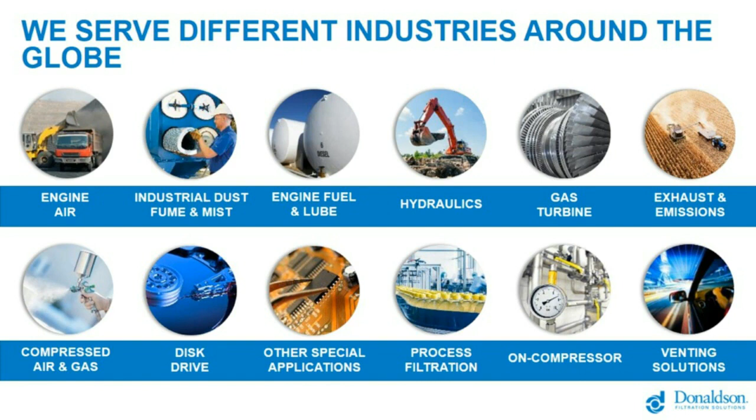Donaldson serves a lot of different industries around the globe, of which some of them are shown here on the slide. We combine different technologies, different shared lessons from different industries together, so we can optimize our products for a certain industry.

So today I would also like to have a small question to start, and I will give the word back to our host, Jonathan. Thank you very much. So now it's time for our first polling question. So for the audience, you can click on any of the options listed below, and we'll have a look at the answers shortly. This question reads, on a scale of 1 to 5, 5 being the most familiar, how familiar are you with the venting powertrain components?

Stan, is there a particular reason why you asked this question today? We would like to know the knowledge of the audience about this topic, and see how familiar they are with how to protect powertrain applications. Perfect. Thank you very much. So we'll just quickly have a look over the answers now. And there we have it.

So we have 35.3% on 2, followed by 29.4% on 3, followed by 17.6% on 1, and followed by 11.8 and 5.9, 4 and 5 respectively. Stan, are these the results you're expecting? Yes, we expected the audience to have a little bit less familiar or basic knowledge level of this topic. So you have come to the right place, because today we will start with a basic level discussion about this topic, but we'll also move further on to a more complex level.

So today we will discuss how to protect your powertrains with venting solutions. So a small overview of what we will discuss today is, what is venting? Why is it needed? Secondly, what are the unique challenges for powertrain applications? Thirdly, what are the advancements of Donaldson in this powertrain venting? And at last, how to validate such a venting solution.

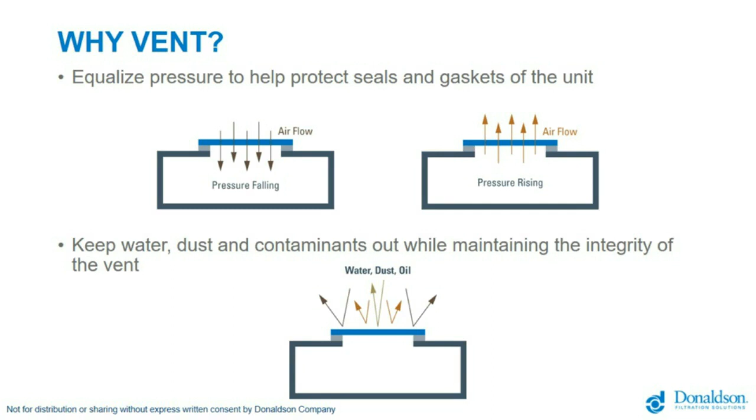Donaldson proprietary ePTFE Tetratex membrane, also called Teflon, is the core technology behind our venting solution. It has a unique micropore structure with small randomly connected fibrils at nodes that can be used as permeable water barriers, so basically being watertight, while the pores still let the airflow go through. Donaldson proprietary oleophobic process also makes the filter repel oil contaminants. So at the same time, the membrane will be hydrophobic as well as oleophobic.

This ePTFE Tetratex is used in multiple markets, of which some are shown on this slide, like microfiltration, syringes, industrial filtration, membrane distillation, but also in the automotive sector, which we will today focus a little bit more on.

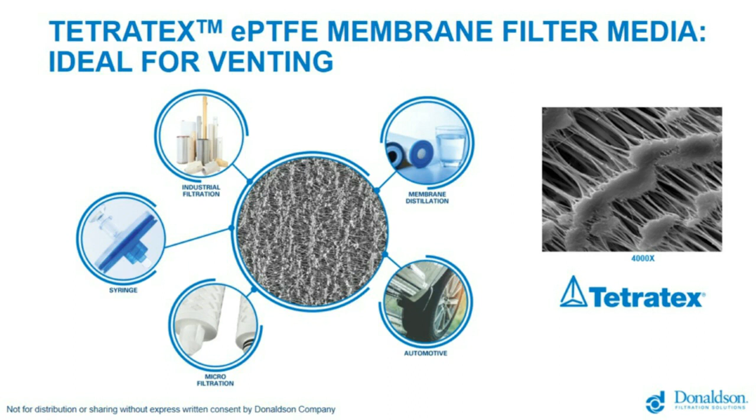If you look at the vehicle, there are multiple applications where a venting solution is needed. Some of them are listed below, like automotive sensors, lighting, horns, electronics, motors and pumps, hybrids, EVs, powertrains, fluid reservoirs. All those different applications have different requirements, so Donaldson has different configurations of our ePTFE Tetratex membrane for the different applications, and some of those standard components are shown on the right on this slide.

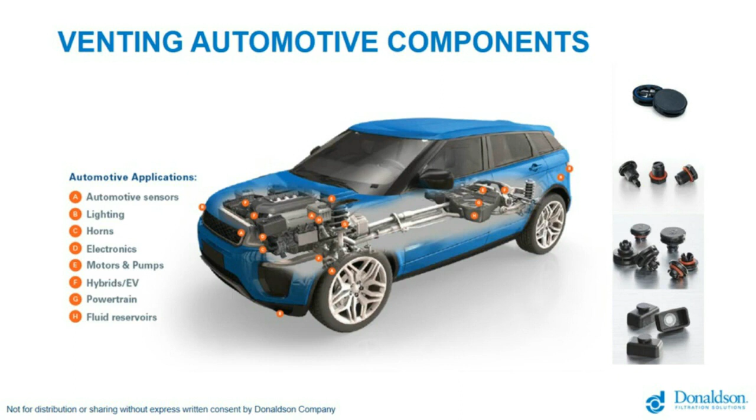If we look at potential vent locations for powertrains more in detail, we see that for the conventional powertrains, there are multiple vent locations possible. Some of them are like transmissions, power transfer units, axles, differentials. But we also see more and more similar needs for EV powertrains, because they have similar requirements, like e-transmissions, traction motors, e-axles.

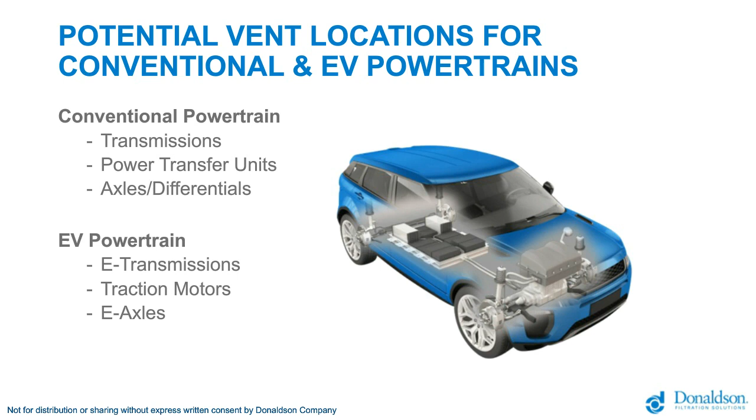But what is now the unique challenge with powertrain applications? In these powertrain applications, there is a lubricant present. If the components start to rotate in this lubricant, it will create a sling region for the oil, but it will also create an oil aerosol which will become entrained in the air volume. But after long-term continuous exposure, this oil aerosol will create an oil film layer next to the vent, which will prevent the vent from letting airflow through, and so it will stop the pressure equalization. This even happens when the membrane is oleophobic coated.

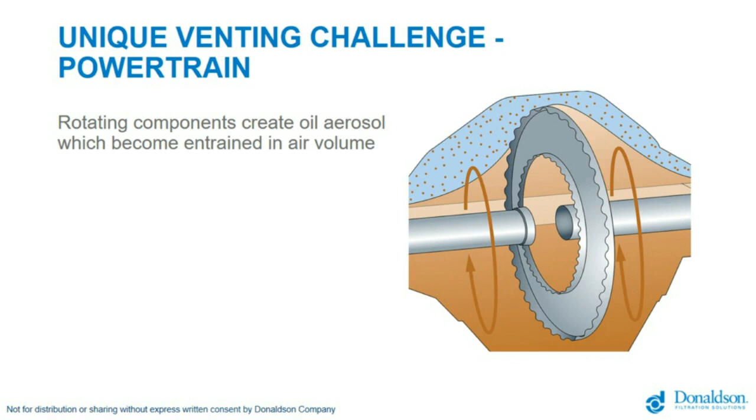Today, there are already some common venting methods for powertrains, like a jiggle cap or a hose breather. So basically, you connect the hose to one side of the housing, and the other one is to the open environment. Most times, the top opening of the hose is positioned above the water fording level, so it acts like a snorkel and no water will be going in. But at the same time, a big disadvantage is that contaminants still can go inside, and that the oil aerosol can go outside, contaminating other components of the vehicle.

A second solution could be a membrane-only vent like our Donaldson ePTFE Tetratex membrane. But as mentioned before, after long-term continuous exposure, an oil film will be present, which will stop the pressure equalization of the vent. A third solution could be to use a sorbent media vent. But after time, it will reach its saturation point and will start to plug. At that time, it will also stop the pressure equalization function of the media vent.

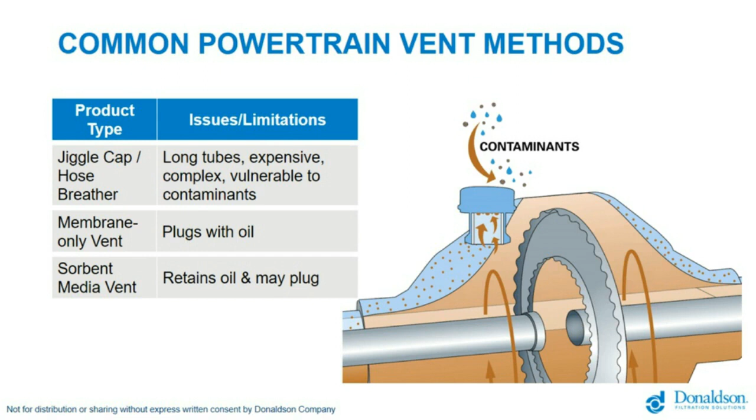Stan, thank you very much for the introduction. My name is Dustin, and I'm going to be covering some of the advancements in powertrain venting technology, as well as some of the validation efforts in the development of the powertrain vent.

As Stan mentioned, the ePTFE is a popular vent medium already used in the automotive sector for various applications. But when exposed to oil aerosol, it can film over, which causes a loss in airflow. And this is one of the more unique issues with powertrain venting.

Donaldson, having 100+ years in filtration expertise, set out to address the filming issue with its proprietary Synteq XP media. So what is the Synteq XP? This technology was developed specifically to reduce crankcase emissions in PCV applications. So the venting group then took this technology and adapted it into the powertrain vent in order to coalesce the oil aerosol present within the airstream in drivetrain components.

So what we did was a customer axle was used and customer fluid was used, and the component was run under various operating conditions in order to produce this oil aerosol, which was then characterized and profiled to understand the venting or the filtration approach needed to filter that out. So Donaldson then selected a particular Synteq XP grade to target the oil aerosols within the powertrain applications.

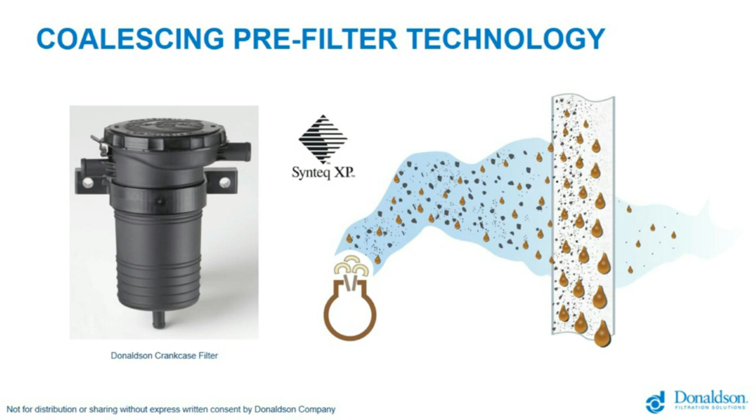So this Synteq XP technology, combined with the water tightness of the Tetratex PTFE, allows for effective venting of the enclosure while helping to maintain the life of the PTFE membrane, which is the real workhorse of the venting solution.

So here we can see the screw fit configuration of the powertrain vent. This is kind of an exploded view to show some of the internals working within. On top we have the vent cap, which in combination with the venting windows on the sides of the head help give water spray protection to the PTFE membrane. Beneath the membrane is the rib support structure, or the media retention disc.

This serves two purposes. One, it provides support to the backside of the membrane during a water fording event or when water pressure is applied from the outside of the vent. This helps reduce the deflection of the membrane and resist that, providing support. It also provides a physical barrier between the Synteq XP media and the membrane media up above. And all of this is in a fairly compact screw fit package all together.

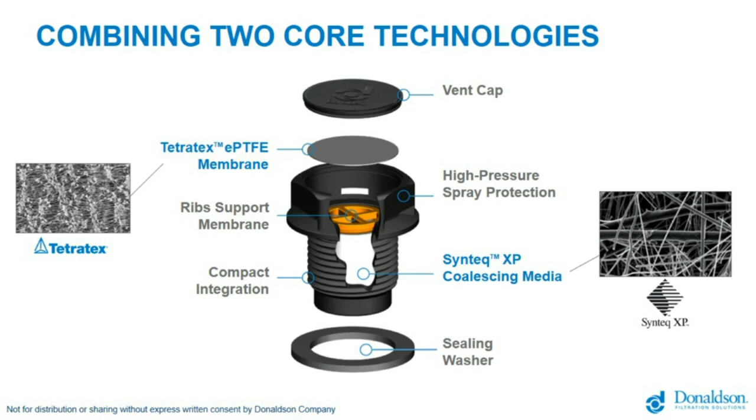In this configuration, all of these components are combined to a low profile integration, which provides the pressure equalization that Stan mentioned was important for venting these powertrain components. It keeps the oil inside the system, but also keeps all of these contaminants outside of the system. Just as an idea of scale, this screw fit vent here is an M20 diameter.

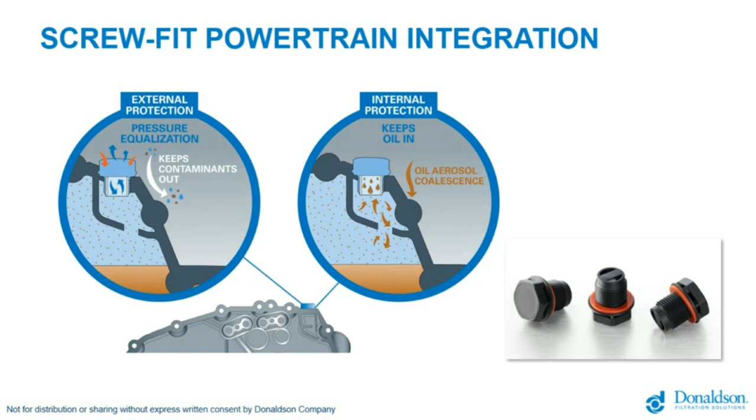So in addition to the screw fit configuration, there exists the hose fit configuration. These are more popular for applications like a rear axle or differential. These are also popular in situations where ease of integration is critical.

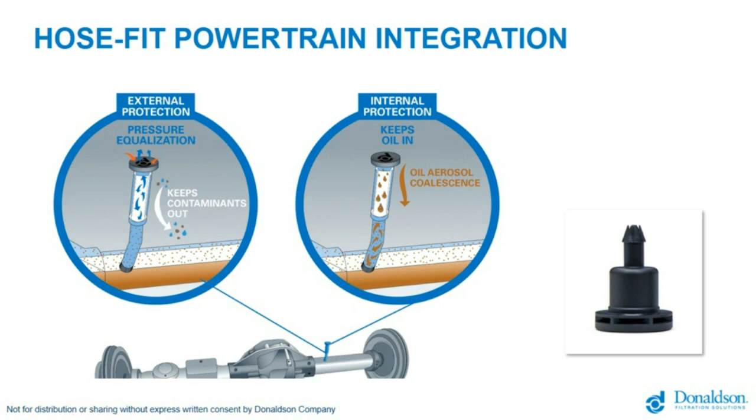There may be a hose barb already existing on an axle that the design is fixed on, and that hose barb may have gone to a jiggle cap or snorkel arrangement. And this allows the hose fit vent to drop in with little to no modification to the existing design. Same core technology of the Synteq XP media as well as the Tetratex PTFE is deployed in this hose fit configuration as well.

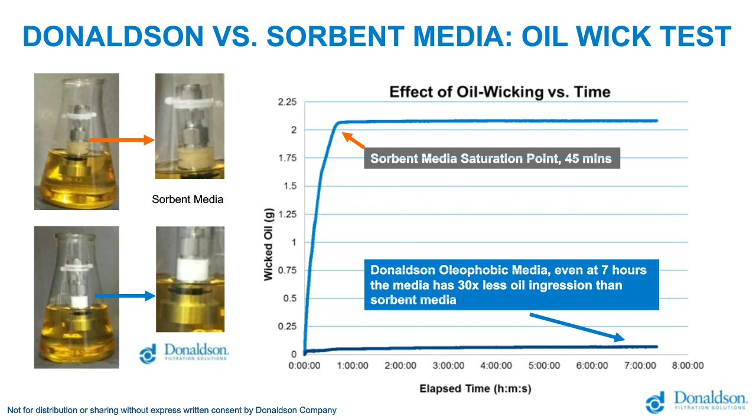So this test illustrates the liquid oil resistance of the pre-filter media. But another key question is, how does it do against oil aerosol? Now, this is the most challenging component of the powertrain venting problem. Prior to on-vehicle testing, and this after the wick testing, the assembly was evaluated on lab equipment on a lab scale using aerosol generators, which simulated the actual component aerosol generation.

So a customer component was run on a lab stand test and run through the duty cycle so that we could characterize and profile the particle distribution, and then we could come at it with a theoretical filtration calculation in order to take care of that filter contaminant. So once this was studied in the lab and we characterized the particle distribution, we then simulated that distribution on an aerosol generator test bench in order to study empirically the effect of the filtration media.

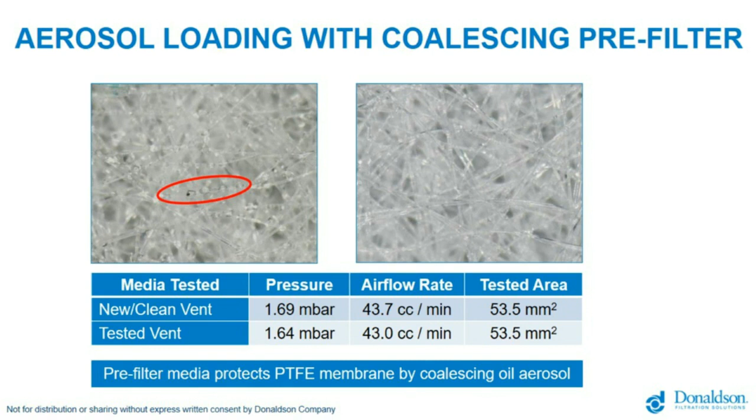So this suggests that the theoretical calculations for filtration efficiency do correlate with the empirical data we took in the lab, and this helped us understand that this particular grade of Synteq XP media was effective at collecting the oil aerosol. In addition to the lab testing, Donaldson moved forward with on-vehicle testing to understand the performance of the part in situ.

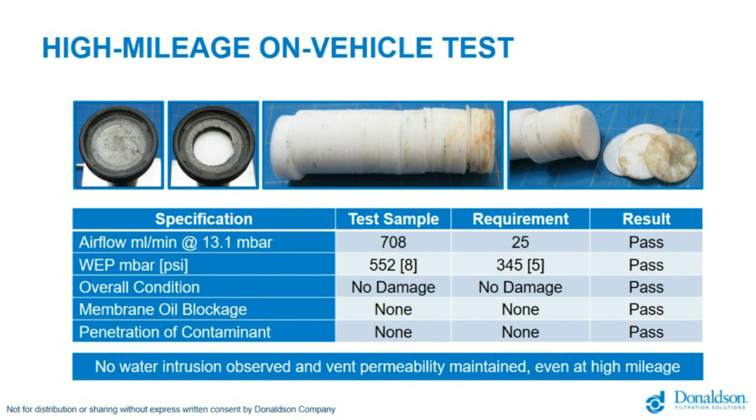So the far right image shows the Synteq media removed, and the top of that stack in the image is the bottom of the stack in actuality, so it was inverted upon removal to show the area that would be most exposed to the oil aerosol. And here we see very little evidence of oil aerosol through observation, but in addition, we saw the high permeability maintained as well of the vent assembly. So no water intrusion was observed in this case as well, and the vent permeability was maintained throughout the test.

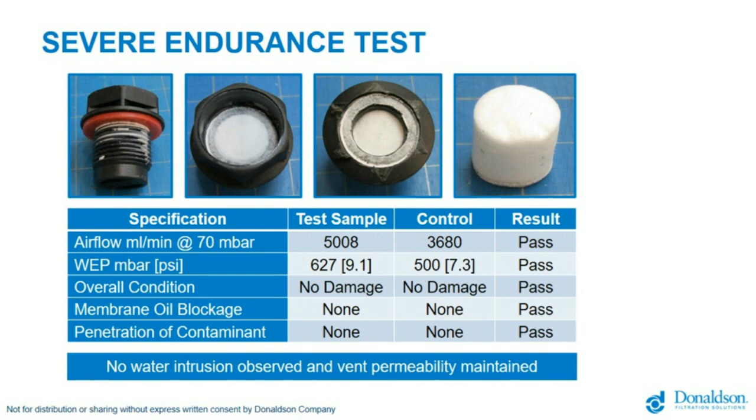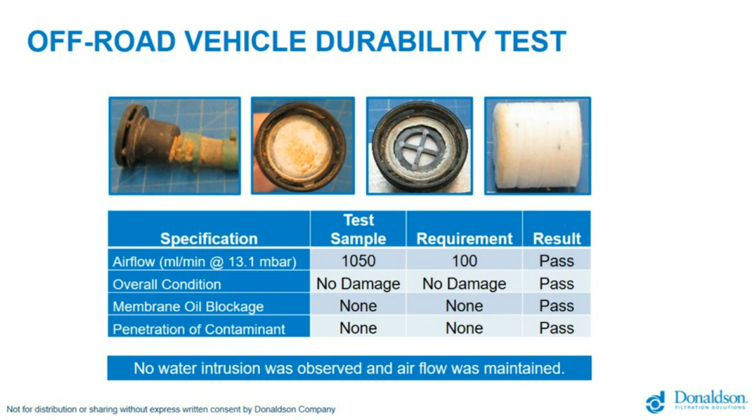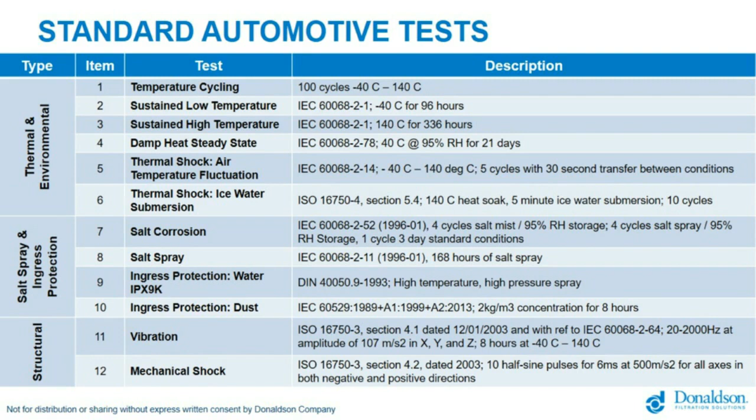So when you design and procure venting solutions, it's critical to understand the importance of venting powertrain components, and as Stan said earlier, to maintain your seal integrity and keep contaminants out while also keeping the oil within the system. Care must be taken to leverage the improved membrane technologies that provide protection for the water tightness and dust tightness of the membrane, but also allowing it to have long life in powertrain venting applications with that oil aerosol contaminant. And thorough validation is also essential for establishing a benchmark to understand the long life of the venting component, as well as sufficient ingress protection on each unique venting application dependent on the drivetrain component.